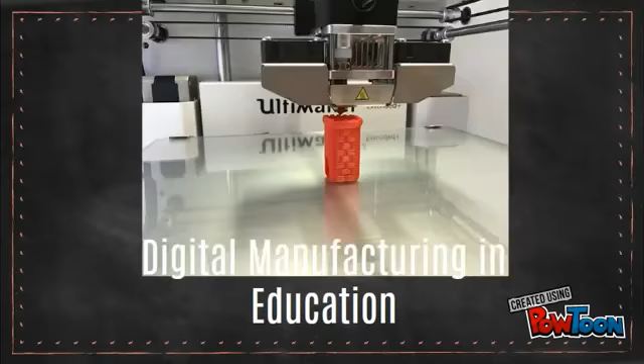As we move into the 21st century, digital technology has provided us with a vast array of new products and ideas to help enhance our daily lives. These technologies are likely to present both opportunities and challenges in the evolution of education and teaching in schools.

Teachers and students now have ready access to a vast array of online information and knowledge. Facts and information are available on almost any connected device. This could be seen as bringing a paradigm shift in the purpose and priorities of education, away from memorising and understanding facts with the teacher as the sage, towards understanding concepts and processes with the teacher acting as a guide and other students as collaborators to gain knowledge. This means teaching and learning can focus more on conceptual why and how, and less on factual what and where.

These technologies have also brought about another paradigm shift. Because online resources are a two-way street, not only can students consume content from online sources, but as discussed by Wheeler, through various publication sources including social media, blogs, wikis, online libraries and even personal web spaces, they can also become content creators. This means students can now be an active part of the online learning community rather than passive consumers of knowledge.

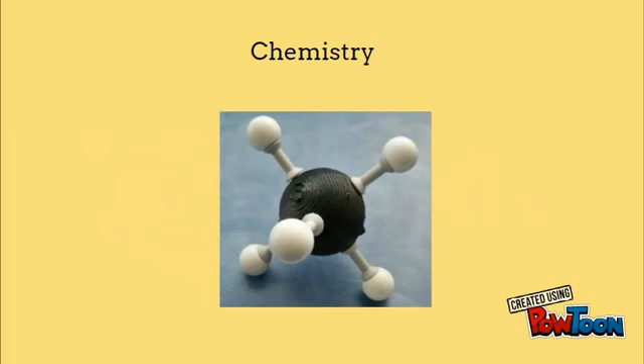For example, in science subjects, digital manufacturing allows teachers to provide conventional or customized models of concepts they're teaching. A few examples of these include, in chemistry, models of molecules and atoms from which they're made can be provided as physical teaching aids, and these can be customized for the experimental concept being taught.

In physics, objects can be made which allow the study of principles of displacement and buoyancy, and by changing the digital model and remanufacturing, the effect of changes to the object can be studied.

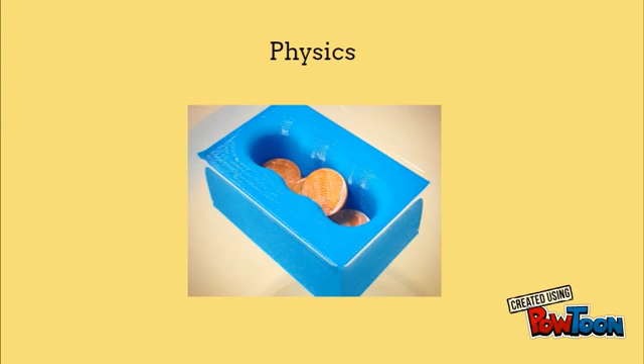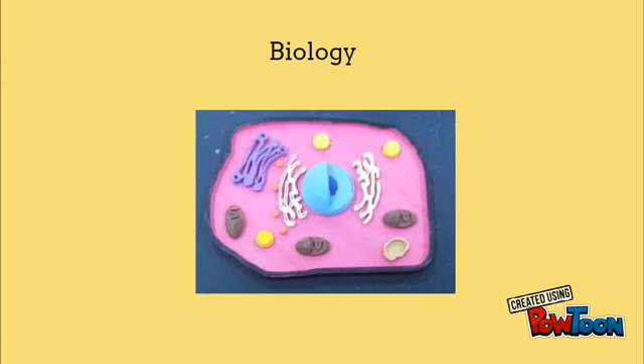In biology, models of microscopic cells and organisms can be produced to aid students in identifying these under a microscope in environmental experiments. And in mathematics, teachers can produce customized geometry shapes or model components to help illustrate the concepts of geometry.

However, the teaching applications for digital manufacturing go beyond the technology and science subjects into many others, including those which may have previously been non-technical.

For example, art students can now create 3D versions of their illustrations and bring their artwork to life. In drama, props and even entire sets could be created to support a school production. In geography, 3D maps and mountain cross-sections can be made to illustrate the concepts of the formations of continents and land masses. And in history, historical tools and artifacts can be recreated to help students visualise what life might have been like in the past.

One of the major benefits to teaching for digital manufacturing is in student engagement and the ability to provide differentiated learning for students with varying learning styles. Digital manufacturing enables students to become hands-on and interactive with their learning. All of the examples above provide this type of student engagement. However, even in a subject such as English, 3D objects such as puzzles or jigsaws could be created which use the rules of grammar or spelling to help solve.

So what types of digital manufacturing are available to teachers? Digital manufacturing and rapid prototyping tools can be divided up into two broad categories: subtractive manufacturing and additive manufacturing.

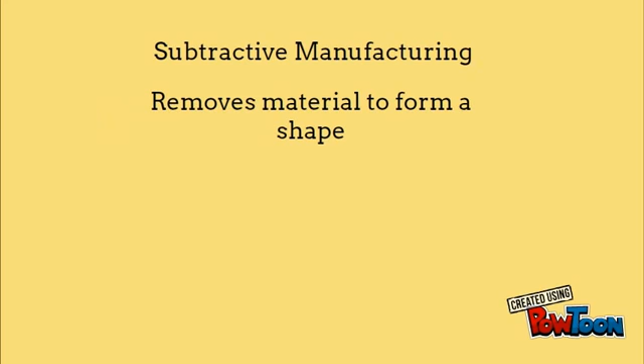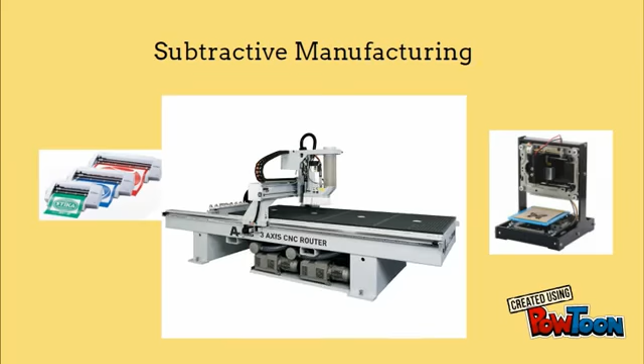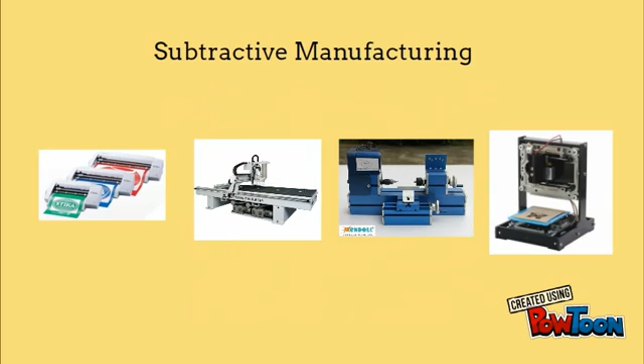Subtractive manufacturing takes a raw material and selectively removes parts of the material to form a shape. Examples of cost-effective subtractive manufacturing include vinyl cutters, engraving machines, CNC routers and CNC lathes. Subtractive manufacturing has a number of advantages, including often being quick to manufacture and lower cost of raw materials. However, many machines have safety, environmental or operational constraints which could prevent them from being used in a normal classroom setting.

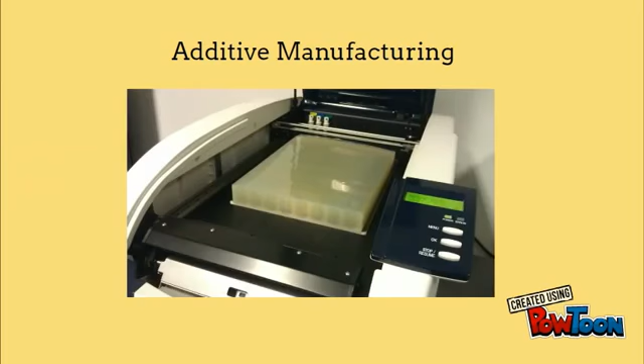Additive manufacturing takes a raw material and deposits it layer by layer into a 3D shape. Examples of cost-effective additive manufacturing include sheet lamination, vat photopolymerization, and material jetting. These last two are also referred to as forms of 3D printing.

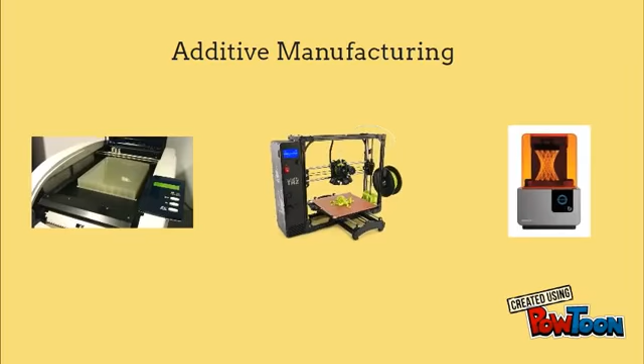Additive manufacturing machines are reasonably safe and cost-effective in the classroom. However, they are generally slower than subtractive manufacturing. Of the two categories, the most suitable for general purpose teacher and classroom use is likely to be additive manufacturing in the form of 3D printing.

So what is involved in 3D printing digital manufacturing? Digital manufacturing is broadly a two-stage process. First, a digital 3D model needs to be sourced or created, and secondly, the model needs to be transferred to a 3D printing device.

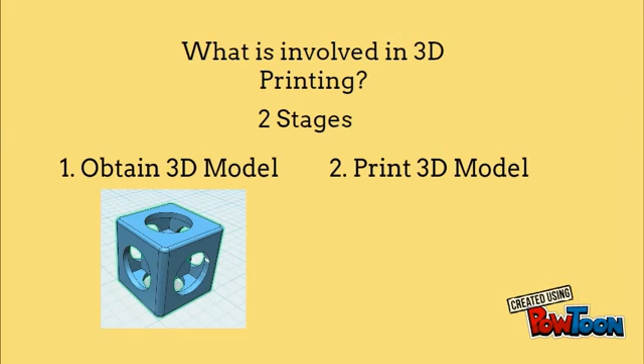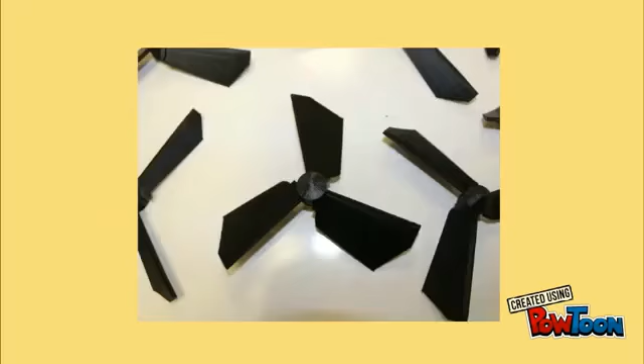So how do we source the 3D models? There are a broad range of pre-designed digital models suitable for educational use available free online. Some of these are shown on this page. These are very useful as either complete models, while some can be used as starting points for customized models.

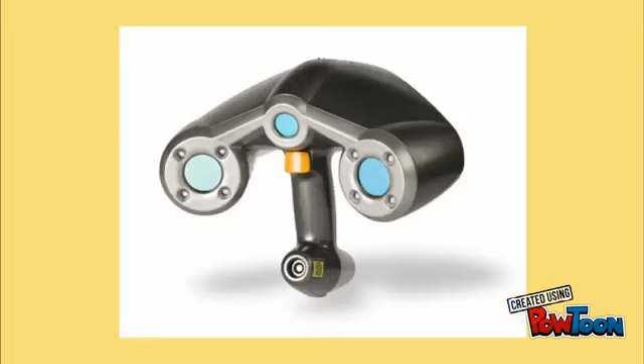There's also the option of 3D scanning. 3D model files can be produced by scanning a physical object. There are a range of cost-effective 3D scanners available, including hand scanners and rotating platform scanners.

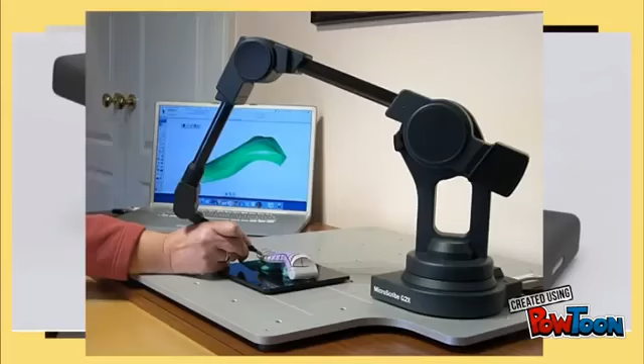Files from 3D scanning generally require more intimate knowledge of 3D design software if modifications to the model outside of straight scaling are required. In general, 3D scanners will either come with their own software or will use the scanning functionality of some of the more popular 3D design software suites.

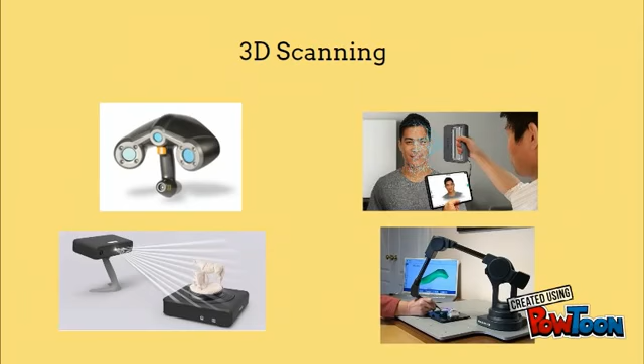For most teachers, the 3D scanning hardware options which are likely to be affordable are not highly accurate, and all of them are optimized for objects of a particular size and finish. However, they do provide a starting point into 3D modeling.

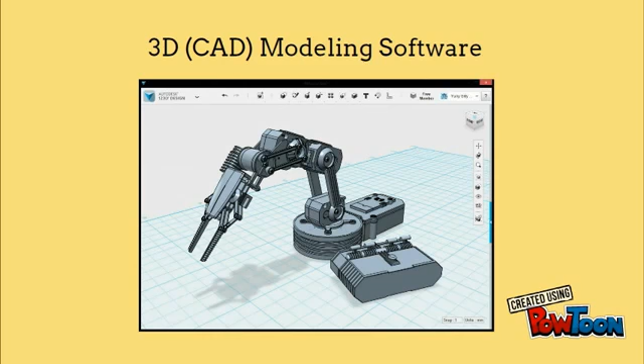Whether creating a model from scratch or modifying files from another source, at some stage being able to use 3D computer-aided design software is likely to be required. Modelling software comes primarily in two forms: subdivisional modelling and parametric modelling.

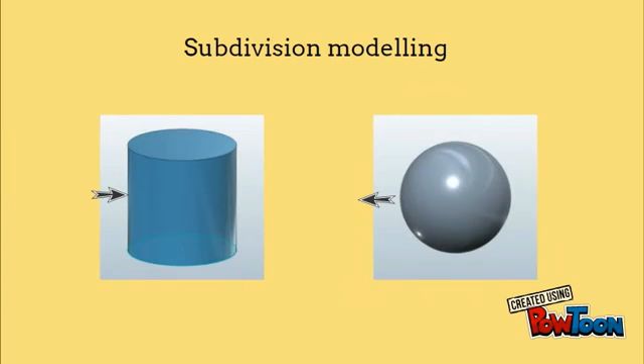Subdivision modelling takes 3D primitive shapes such as cylinders or spheres and allows the user to push and pull the shape to form the 3D model, in a similar way a sculptor would sculpt clay. This type of software is also good for manipulating 3D scanned model files and would be a good approach for people already comfortable in creating a real-world 3D object.

Parametric modelling generally starts with a 2D shape or drawing and converts it to a 3D shape. This shape can then be combined with or cut out of other shapes to form the model. Parametric modelling software often describes the shapes created as a set of mathematical parameters, and because of this, some also allow the user to directly enter mathematical equations to generate shapes. This type of modelling is good for people who have less experience with real-world 3D object creation.

3D design software has evolved a great deal from the early days of CAD software, which required in-depth training to operate, and many are now very intuitive. However, all require some familiarity with their use and, more importantly, a practiced understanding of the conceptual difference between 2D and 3D drawing and representation.

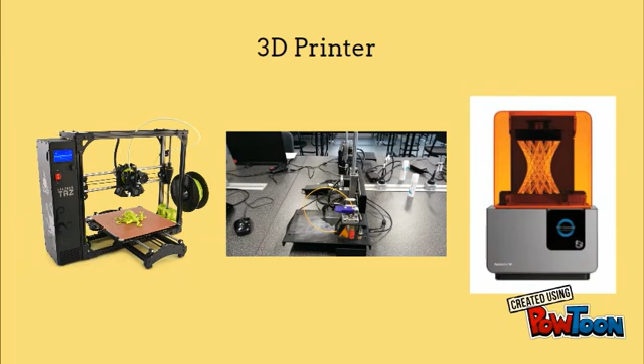In general, printing software will be required to enable 3D design files to be turned into the native G-code understood by a 3D printer. This software will usually also have the ability to let you change scaling, modify print resolution, and estimate print time and raw material usage. This is useful when a design ends up bigger or smaller than expected, or if the print time becomes prohibitive.

Some 3D printers are able to print autonomously once provided with a compatible 3D G-code file. For these printers, any post-design modifications like scaling need to be done in the printing software before submitting to the printer. In some cases, the printer requires a computer to be connected to it, and printing is then performed directly from the printing software.

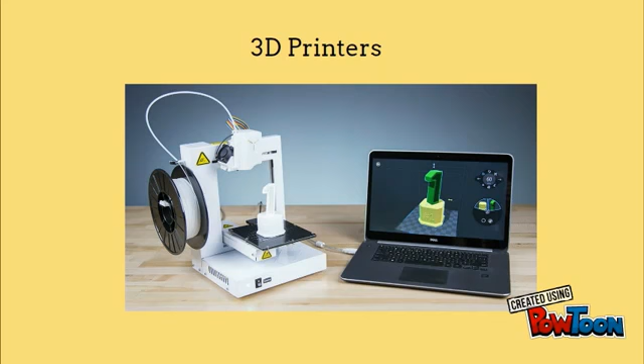The first type of 3D printer is the polymerization or stereolithography printer, which uses a liquid polymer resin that is exposed to a focused UV laser light. This causes the polymer to solidify. The laser draws the object in layers as the object is gradually withdrawn out of the liquid bath to allow the next layer to be formed.

These types of printers are generally an order of magnitude higher in cost than filament printers, as are their consumables. However, the resulting print is usually of higher quality than the filament printers, and there's little raw material waste.